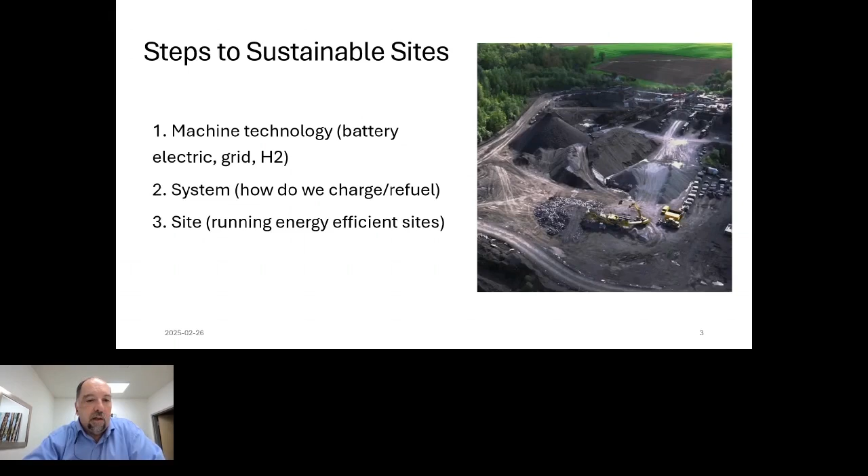So is there a way with electric drives where the batteries are very heavy, for instance, is there a way to use smaller batteries and very fast, often recharge and do your work that way rather than carrying around 450 kilowatt hours of energy in tremendously heavy batteries and carrying that around all day and taking away from your payload. So those are the ways we got to be thinking about how we're going to convert these to sustainable sites.

There's 5 basic solutions that we see going forward for sustainable power for the first part of those 3 steps I was looking at. So battery electric and the machines for that are already starting to appear on the market. So there are a lot of compact machines from a number of different suppliers that are battery electric driven. And some suppliers have started to move into the mid-level machines now. So we are looking at 20-ton excavators, 5 cubic yard loaders that are battery electric powered.

If we don't have battery electric as an option, we can go to alternate fuels. So biodiesels, renewable diesels, they are good options, especially since they're mostly applicable to current machines. So if you want to get your carbon production down on the site today and you have diesel machines, you can switch to a renewable fuel and burn much cleaner from a net carbon point of view than you would with a pure petroleum diesel.

If you are in an area where you can connect the machines directly to the grid, which requires the machines to be fairly stationary, that's a wonderful solution because you can draw grid power almost on an unlimited basis and power your machines that way and get the job done.

There are a number of hybrid solutions, which is the 4th solution I've got up here. And this is hybrid not only in your power drive, so it could be a small diesel engine running a generator, charging a battery to run your machine, but we could also look at hybrid attachment systems. So instead of running the hydraulics to the attachments and running it that way with all its efficiency losses, why don't we just go electric to the attachment and run an electric motor at point and do the attachment that way? So there's a lot of different options there, again, to be more energy efficient in the work we do.

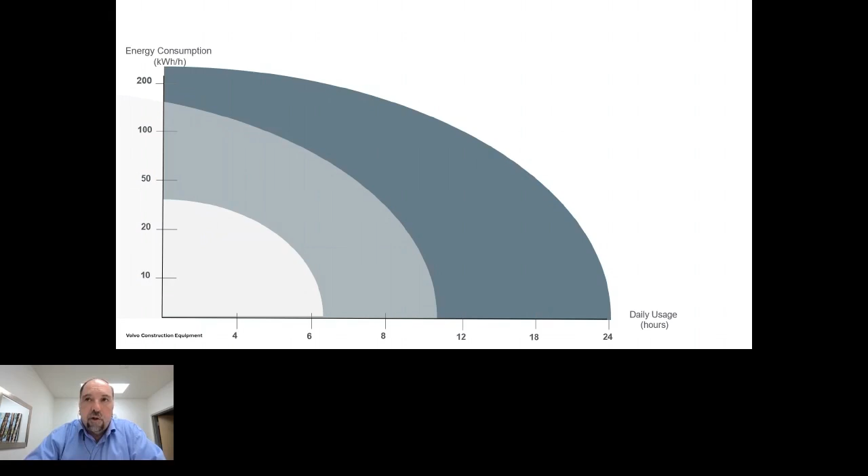So we look at it basically with a grid where the hours of use per day are along the bottom. So you go from 0 use hours per day up to about 24 hours a day, which is of course the maximum. And the power on the vertical axis, in this chart, it's from 0 to 200, but of course we have machines that use 1,000 kilowatts to do their production. And if we plot the different types of machines that we deal with along those 2 axes, you get a picture something like this.

Now, there are always exceptions. There are small, compact pieces of equipment that work much longer duty cycles, and there are large pieces of equipment that work very short duty cycles in certain applications. But in general, this is what you see. The larger the machine, the more the power requirement, the higher it'll be up to the right on the chart. And the smaller compact machines, we generally see shorter duty cycles during the day.

They get 2 to 4 hours of generally work hours, and then the rest is idle hours, whereas a haul truck in the upper right-hand corner may be hot-seat operators running 24 hours a day. They just basically, one operator stops, gets off the machine, another operator jumps in, does a quick maintenance check and service check, and goes to work. So they may run literally 24 hours a day with 3 operators or 4 operators.

So this is the type of spread that we have, very different than something like the automotive industry, where the average, you're concerned with range, but basically, most cars now are up to a 5-6 hour range limit, which is about what most drivers are going to want to do before they stop and take a break anyway. So that's a much different duty cycle than some of the duty cycles we have to deal with.

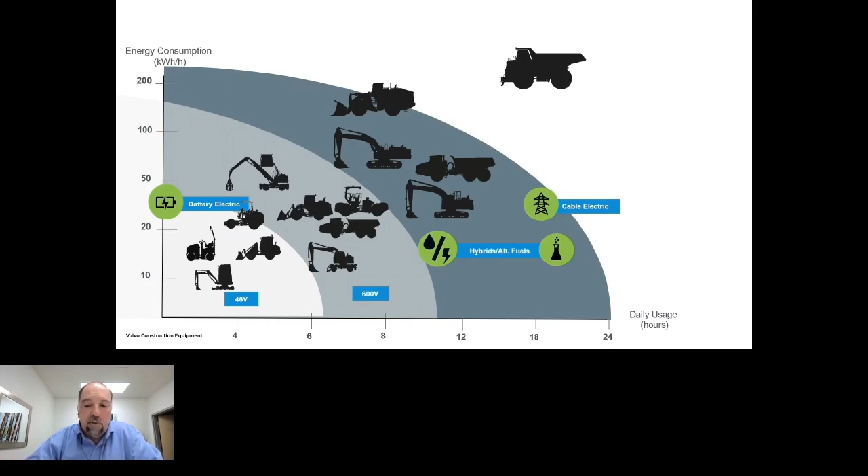If you're able to cable electric or grid connect the machine, that's a great solution. And when you get to the very, very heavy drives, the only viable solution that we see right now is either grid connected electric or fuel cell hydrogen combustion, but basically hydrogen fuel source.

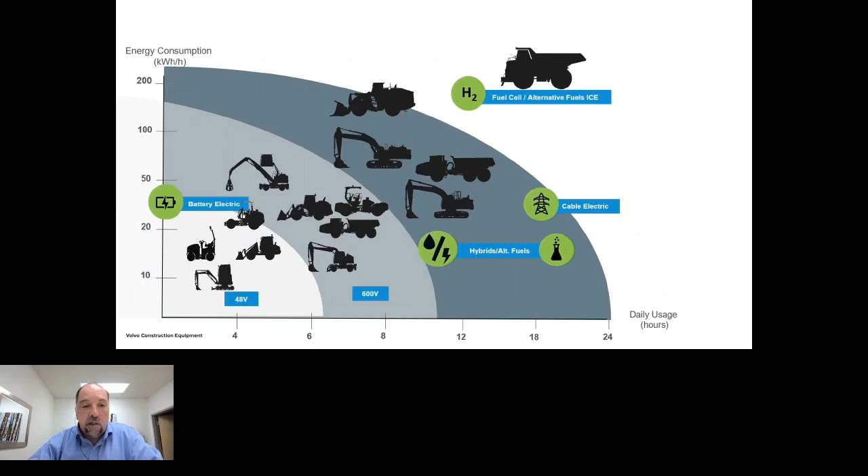And the problem, of course, with hydrogen fuel source is we need the infrastructure. Not everywhere has hydrogen readily available to fill your truck up. So you're looking at not only investment in machines, but investment in hydrogen production and hydrogen storage on your facility to run those very high applications. But that is a very viable next solution if you're in that type of application.

So where we are on this journey so far, we have basically 6 products in the small 48 volt range that are commercialized. We have a couple more coming out this year. So those are the 48 volt battery electric machines. And then we have 2 mid-range machines, a 20-ton excavator and a 5 to 7 cubic yard loader, that are, again, battery electric machines. We have concept machines in a lot of the other drives. And of course, we do alternate fuels and grid machines in a lot of areas. But these are really what we consider to be the new and emerging technologies, running battery electrics in heavy equipment.

And of course, if you have a battery electric drive, you have to provide your customer a way to charge it. On 48 volt systems, it's fairly easy. You can have a plug that charges into, in our case, a 240 or 208 level 2 charger, and will charge the machine overnight. You can even plug it into a 120 volt household outlet. It just takes longer to charge.

Or if you're not in an area where you can plug in easily, we're providing mobile power packs where you can charge up the power pack, which is just a big battery, take it out to your machine, plug the machine in, and recharge it that way. And they're available in both level 2 AC charging or level 3 DC fast charging for those 48 volt systems.

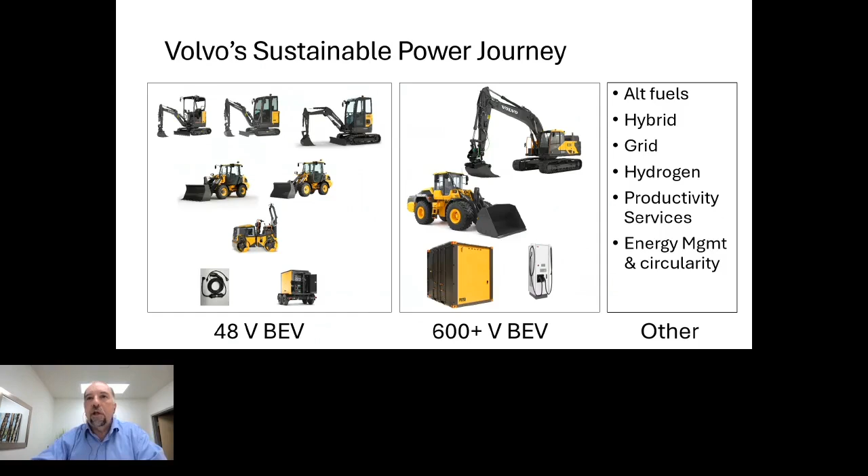So the point is that there's a lot of options because we realize that not everybody is going to have the luxury of rolling their machine up to a common grid point and having that kind of power available that you're going to need to get these machines quickly back to work.

So I'll just pause there. So we've kind of gone through a lot of the theory behind it, the solutions that we're working on, and the products that you're starting to see appear in the field, and where we think the next technologies are going to appear. But I want to switch gears a little bit now and actually look at an example of a mid-sized machine that we've had out in the field.

We launched this machine about 2 years ago. So we're starting to see enough hours and enough experience with them to see what it really can do and what are the challenges and what are the opportunities with this type of machine. So we did a number of pilots. I'm going to focus on one particular pilot that we did in Southern California.

And if you look at that, the diesel equivalent to this machine, called a 220E, would have burnt about 4.05 gallons per hour. So that would be its consumption in normal work over thousands of machines, thousands of different duty cycles. We know that's the fuel it's going to burn on average. The diesel price, in this case, was $5.29 a gallon. That seems high to a lot of people. They will say, you can get diesel for four something.

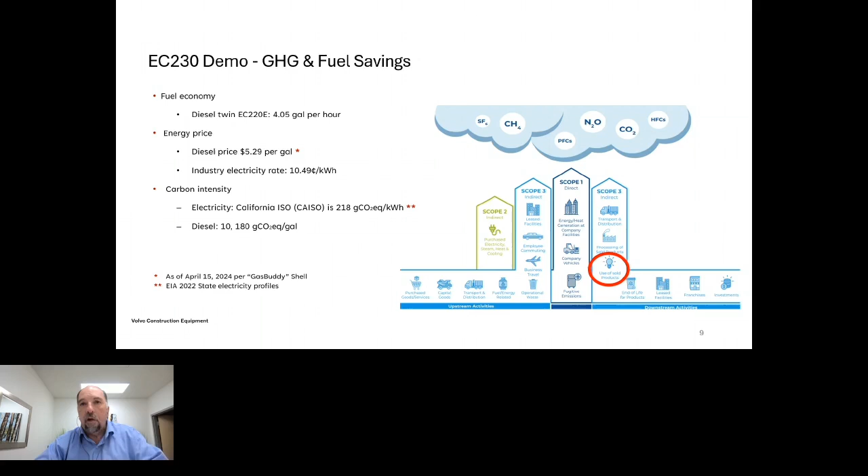So when a customer comes to me and says he wants help getting his carbon footprint down 30% by 2040, or whatever his particular goal is, I'm not going to achieve that focusing on the 6%. I've got to focus on that 94% if I'm going to get him a meaningful reduction, which is why we spend most of our time worrying about the power source, the energy source, and the energy consumption of these machines and these job sites.

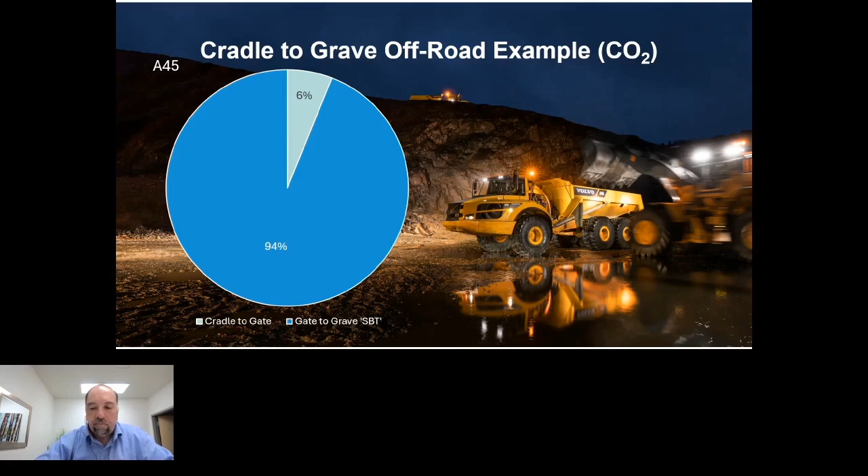So getting back to the trial that we did, we ran 122 hours in this short trial. If we were burning diesel at 4.05 gallons an hour, and that includes the idle time, we would have produced about 5,000 kilograms of CO2 equivalents. With the electric, we consumed 4,536 kilowatt hours, which only produced 989 kilograms of CO2 equivalents. And all of that was in the grid electricity, in the power generation.

So the machines obviously produce no greenhouse gases when operating an electric machine, but there are greenhouse gases depending on how you charge it up. So essentially, if you charge it from a windmill or a solar plant, this might drop much lower than that, but this is the California rate of the grid electricity. So what that means is at the end of the day, your carbon emissions into the atmosphere were down by about 80%. And this is the California case. If you looked at the national grid, it's still down by about 65%. So it makes a significant difference.

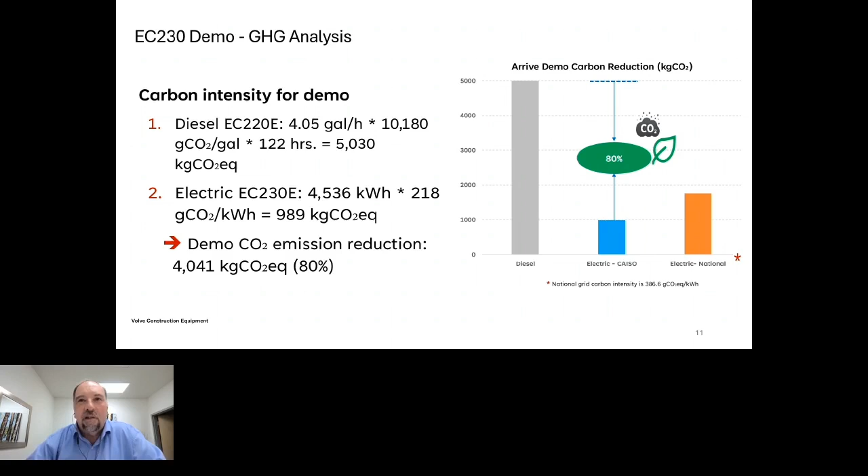Now, a lot of the people, when I talk about this, they say, okay, 4,000 kilograms, I don't know what that is. I don't know what that means. Or, 80% reduction, what does that really mean? So if you go electric with one of these excavators, it's the equivalent of taking about 13 cars off the road or converting 13 cars to electric drive.

So if you take the total cost of 13 EVs and balance it against the total cost of one machine to electrify, it's starting to be a pretty good equation to get quick sustainability wins or a lot of progress on your sustainability journey.

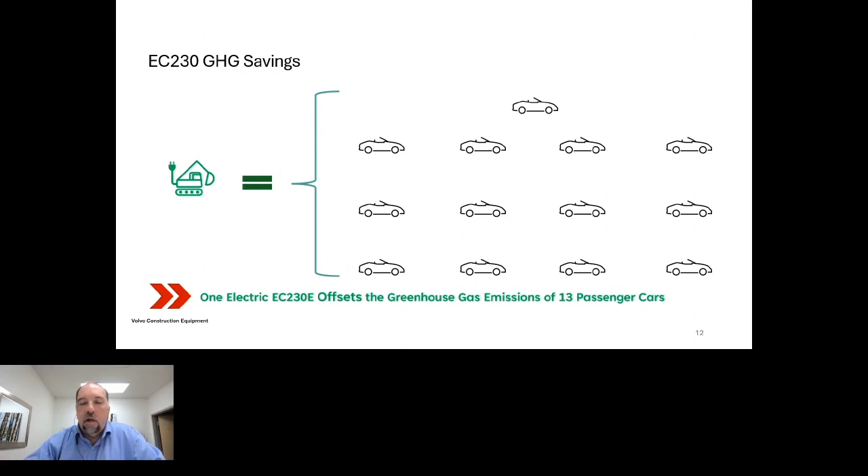One of the things that critics will often challenge me on in presentations, they'll say, well, yes, but producing a battery and mining the rare earth minerals that go into your batteries have a heavy carbon footprint. Absolutely true. We're not going to argue that. We're not going to dispute that. In fact, we have about 28% more embedded carbon in an electric machine than we do a diesel.

So I often joke about sustainability. If you're going to buy one of these electric machines and park it in your showroom, you've just done worse for the environment than if you had parked a diesel machine in your showroom. And that's the reality of it.

Now, the good news is because of the fuel burn, you make that up in about the first 800 hours of use. And by the time you've run about 4,000 hours, which for one of these machines is about 2 to 3 years, you've offset the entire carbon of the machine, either diesel or electric. So definitely it is more carbon intensive to build these machines. They are more expensive, but the effect over time is quite significant.

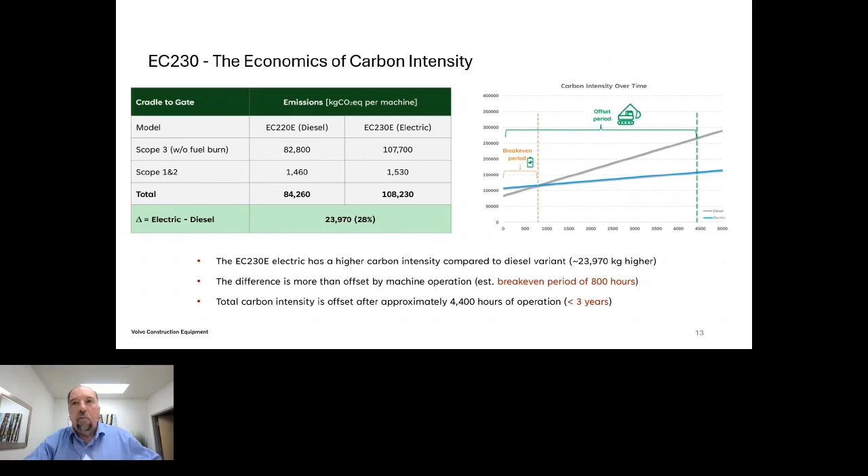So after this, we want to take a look at the economics of it. Okay, it's great carbon wise. Does it make sense economic wise? That's one of the 3 pillars I talked about in the very beginning that we have to keep in balance. So again, in this trial, the 122 hours at $5.29 a gallon, we burned a total of $2,614 worth of diesel fuel through our theoretical diesel twin. The electric machine, 4,536 at 10.49 cents, was $476.

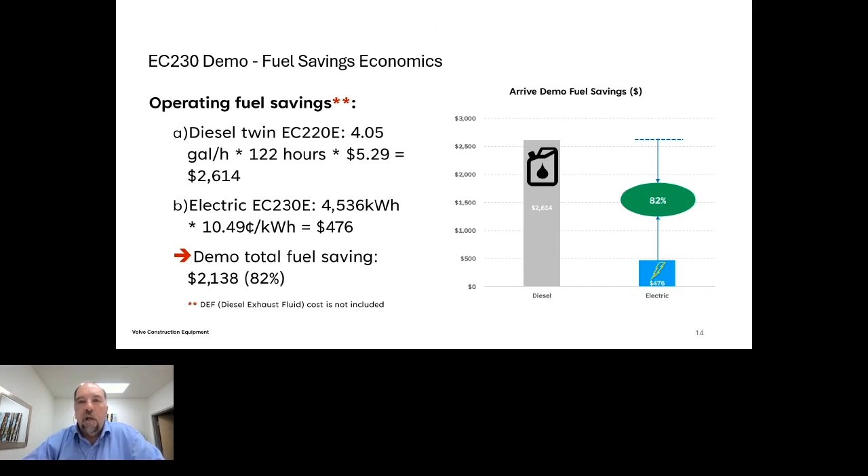So your fuel savings was 82% per hour. Your cost of operating the electric machine was 82% less than an equivalent diesel machine doing the same type of work in general. But that's not the entire story. We know that the fuel savings are there. We know the carbon reduction is there, but we also have other things to consider when you're looking at an electric machine.

Our estimate is that an electric machine is going to have about 35% less repair and maintenance. So far in the hours that we've been running these machines, that's proving to be a very conservative estimate. We're actually seeing much higher repair and maintenance cost reductions. A lot of that is based on the oil and filter changes that you have to do with a regular diesel machine, and that you don't have to do as often with an electric machine.

But again, some of the critics will say, okay, your repair and maintenance is down. You got less moving parts, less filters, less oils. I buy all that. It's down by 35%. But what about a battery replacement? And that is a very real consideration with electric machines. The batteries do degrade. They do wear out to a certain extent. At one point, they're only going to be good for what we call second life uses, and they will have to be replaced.

So I said, fine. Let's replace an entire battery pack in the machine somewhere during its life and make sure that we take that into account so we give accurate and realistic figures to our customers. And your repair and maintenance savings then drop to about 6%. Okay, still a savings over a diesel machine, but less than the 35% that we were seeing on straight fluid maintenance reduction.

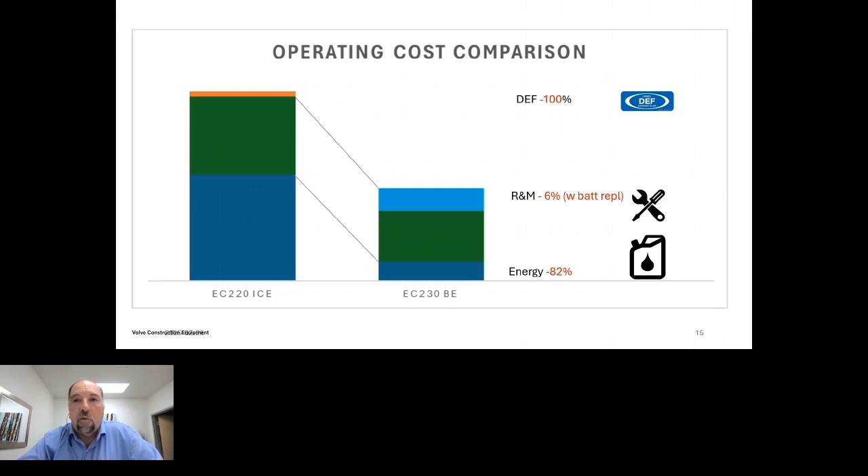But then we have DEF in the diesel engines that we have to take into account. And of course, with an electric machine, 100% of that is no longer required. So that's 100% savings. So if you plot that out, here's what we're basically looking at.

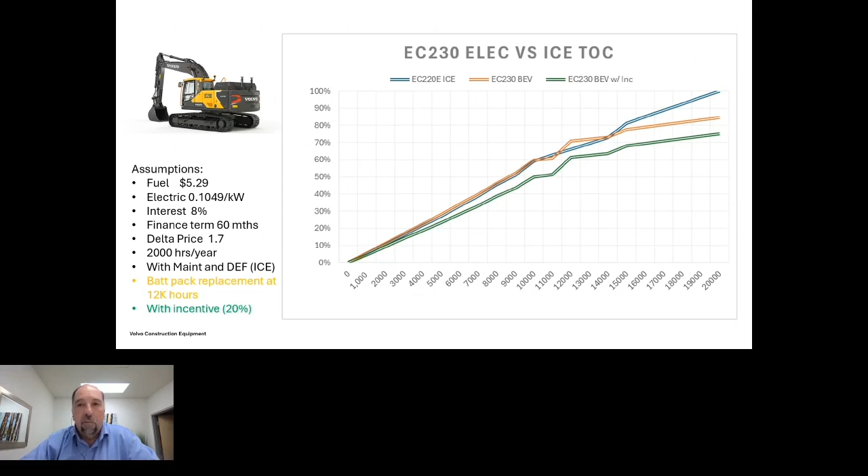So the economic case is there in the right application, and I stress that it's got to be the right application. These aren't a replacement for every diesel case. We looked at the chart earlier where there's other technologies that might be able to replace diesel in certain applications. Battery electric is not the answer for every application. But if the application is right, it certainly can make economic sense and be viable.

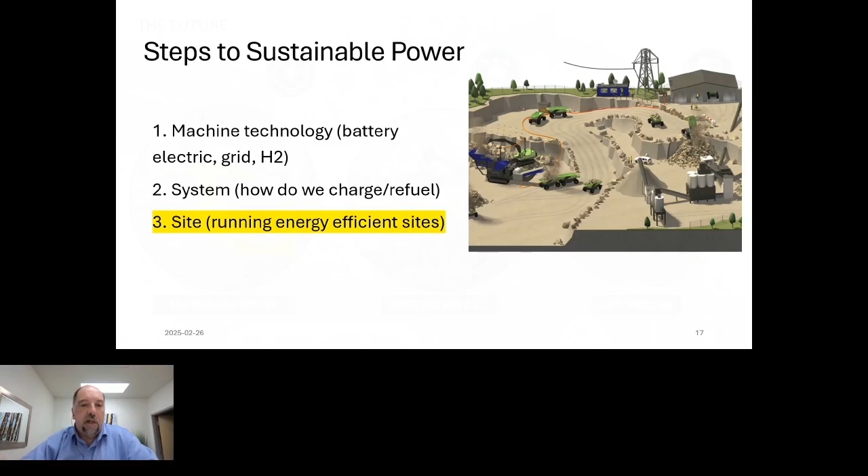So the third step to sustainable power is how do you run your site? And how do you get much more energy efficient? As I alluded to earlier, we've been spoiled by having cheap, readily available diesel, which is a phenomenal energy source. Now we've got to get much smarter at how much we do with every unit of energy we have available to us. And when we're looking at this, we're looking at 3 different technologies coming together. And this is where this journey becomes quite exciting to me, because you're combining the sustainable power or the different energy sources that we can bring to play.

You're combining that with digital and artificial intelligence and even automation to figure out how we can get the most efficient job sites possible. And to illustrate that, we did a test site and basically electrified a site, what we call an electric site trial. And our goal in that site was to get the CO2 down by 95%, the total cost of ownership or of operation of that site down by 25%, but make sure that we were going at equal production rate to the diesel machines we were replacing.

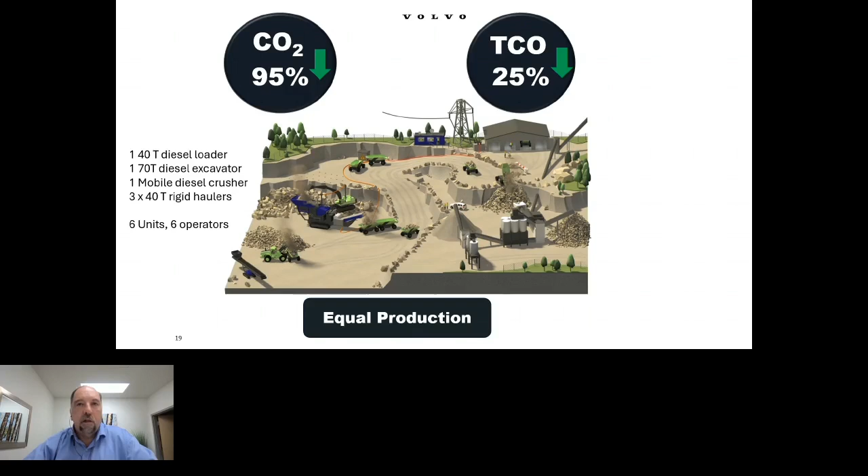So the site that we electrified, we had one 40-ton diesel loader, we had one 70-ton diesel excavator working on the face, we had a mobile diesel crusher, and we had 3 40-ton rigid haul trucks for a total of 6 units and 6 operators.

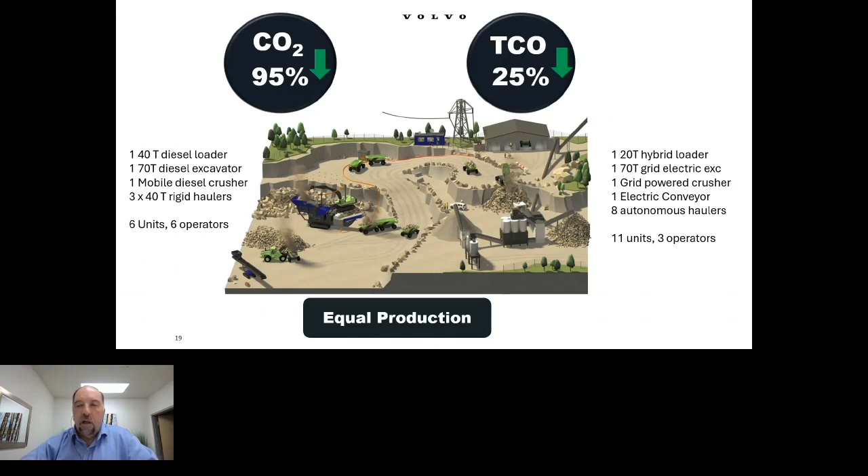So we replaced it with a 20-ton hybrid loader, a 70-ton grid excavator. So we electrified the excavator basically to use it. We electrified the crusher. So instead of a diesel engine burning and emitting fumes, we electrified that crusher. We put an electric conveyor in the system as well, and you'll see that on the video, why we chose to do that, and 8 autonomous haulers. So we replaced 6 units that we had before with 11 units of different sizes, different abilities, but only 3 operators. And what we ended up with, and I'll show a quick video here.

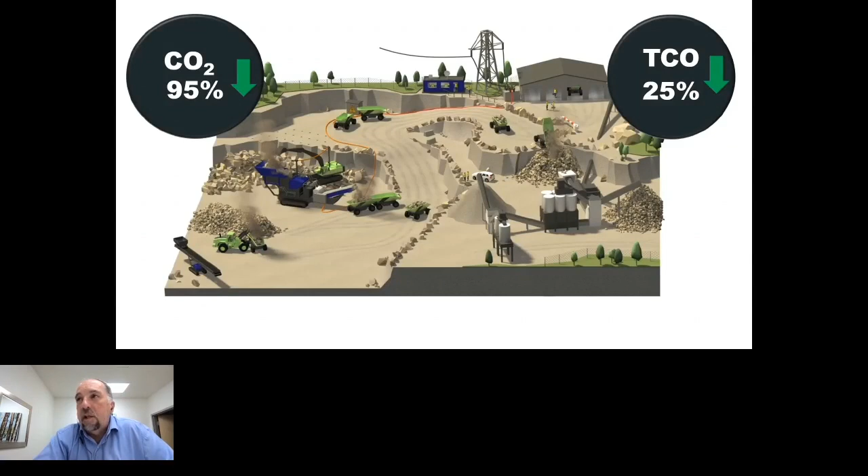But what that allowed us to do was run those autonomous haulers with a very small battery, therefore lessening the price of that hauler and lessening the payload, the weight that it had to draw around, therefore lessening the energy. So the end result of this, sorry, I had to pick up the share again. So the end result of this, our target was 95% CO2 reduction. Our TCO target was 25%. We actually ended up with 98% CO2 reduction. The only thing producing any carbon dioxide on the site was the wheel loader, the hybrid wheel loader.

And again, you'll notice that in the old site, what we would do is basically off the crusher would go into a stockpile. The loader would have to pick it up off the ground in the stockpile, lift it up, load it into the haulers. On the video, you saw why we put that electric conveyor in there, because the haulers could go right behind the electric conveyor and continuously load from the electric conveyor. So the loader then only had to do cleanup and special materials off the site. Most of the loading was actually done with the electric conveyor. Again, a big energy savings.

We also saved 70% of the energy cost. This site, the contractor actually generated his own energy, so his energy cost was zero. But what we did in the calculation here is use the grid energy as a comparator. So if he had bought the energy, it would have reduced it by 70% versus the diesel fuel he would have gone through for the same site, same job, and 40% down the operator cost.

But one of the biggest benefits of this site, not only did it prove that we could do it and equal the production, but the operators reported, and it was Skanska in this case, reported that this site was a much safer way to run their operation than a traditional site would have been. Because when these machines were operating, when autonomous haulers were operating, nobody else was allowed on the site. So the minute anybody drove into the site or walked onto the site, the dispatcher would shut down the entire site for safety reasons.

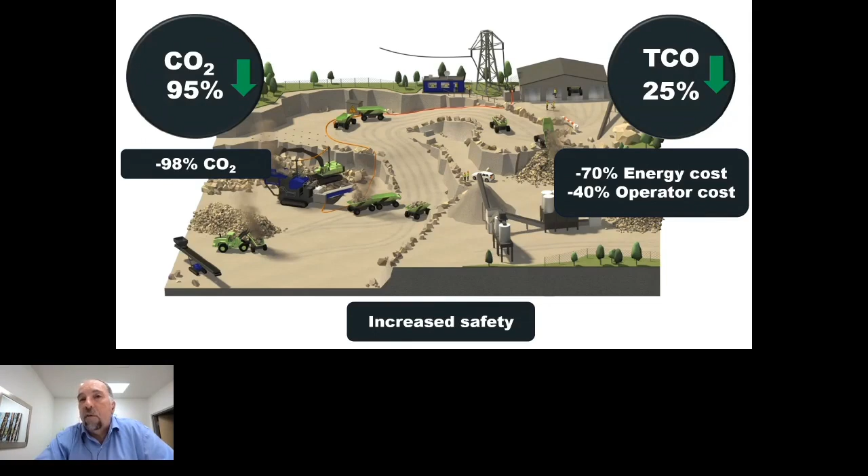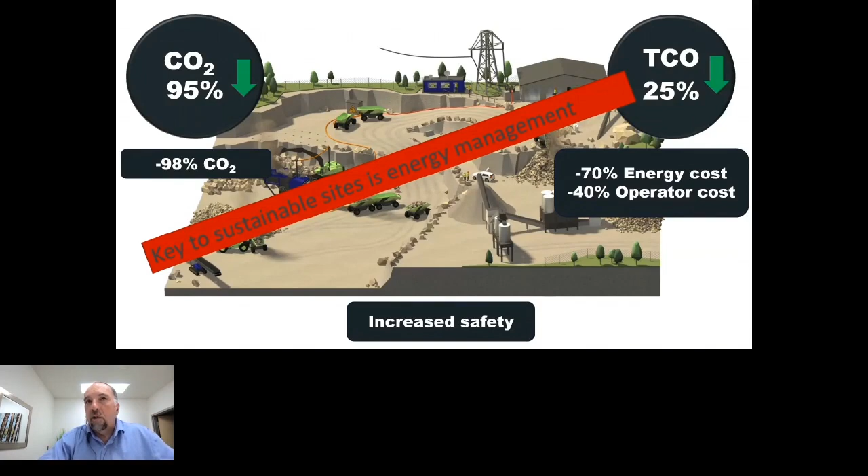So what this proved to us is two things. One, it can be done with the technology today. It can have significant benefits. And two, that the key to a sustainable site is actually in the energy management. So we can do a lot of things to improve the site, to improve the workflow. But if we focus on energy management, we can get it to a sustainable point as well, and meet the goals of sustainability and the targets that we had set.

So with that, I want to close with a quote that I love from Senator Tim Scott, Republican from South Carolina. And he said simply, faith in the future gives us power in the present. So if you think about that with today's situation, basically, we have the people that can solve this. We know how to do it. The technology is maturing. It is there. If we have faith that we will get there, we will have the courage and the ability and the bravado to take the steps that we need to do in the present to make it happen.

So I'm very encouraged by what I'm seeing in general. And with that, I'll turn it over if you have any questions that you want to pose.

Well, thanks, Dr. Gallant. That was a really good presentation, really helpful. I have a number of questions. We've got about 10 minutes.

Here's one on the TCO calculation. The audience member says, very interesting, the TCO calculation is in favor of electric. If we also consider carbon emission savings, he was wondering why for the OEMs, it's sometimes hard to convince users to go electric.